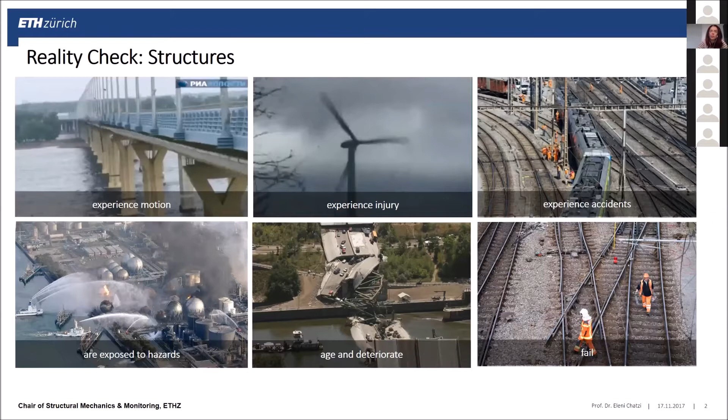As the name of my chair implies, our focus is twofold: structural mechanics and monitoring. We deal with aspects across this chain, from data acquisition via sensing, to the use of models coupled with or independent from the data, usually taking dynamics and nonlinearity into account, to assess performance of structural systems, derive useful indicators derived from these models, and finally support decisions for the protection of engineering systems and assets.

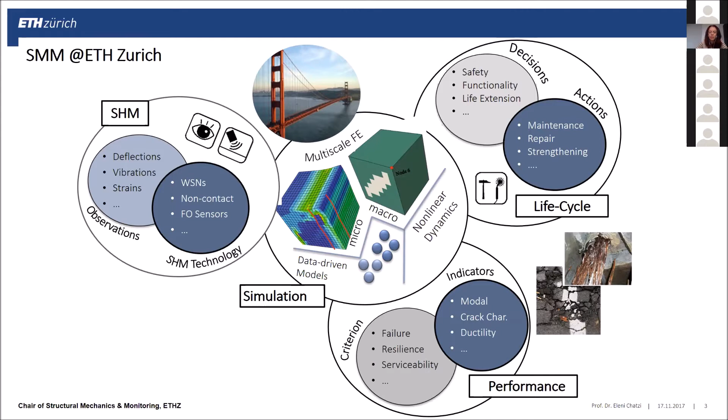In this context, we're also dealing with the seismic challenge. We have activities along these lines for earthquake applications. One has to do with hybrid testing, the mixture of numerical models with physical experiments for testing and understanding the behavior of complex systems.

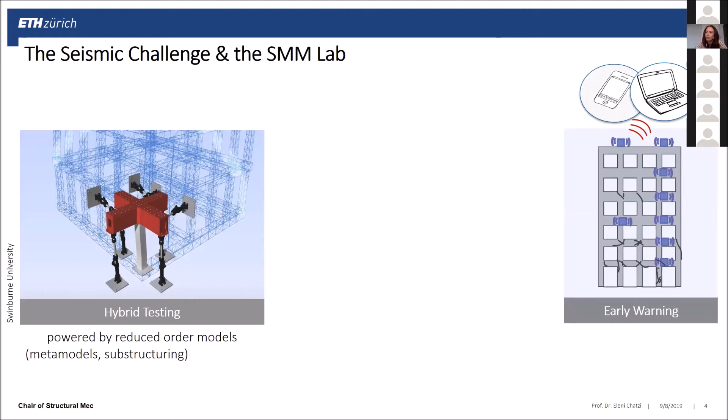More recently we also try to use sensors for monitoring of buildings before and during the event of an earthquake, so that we can fashion warning systems for response reaction.

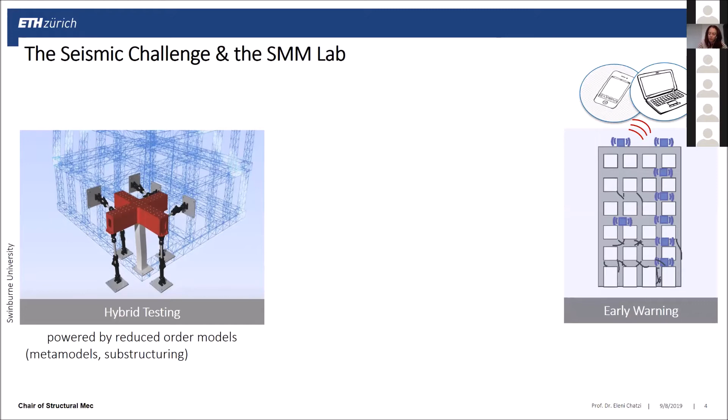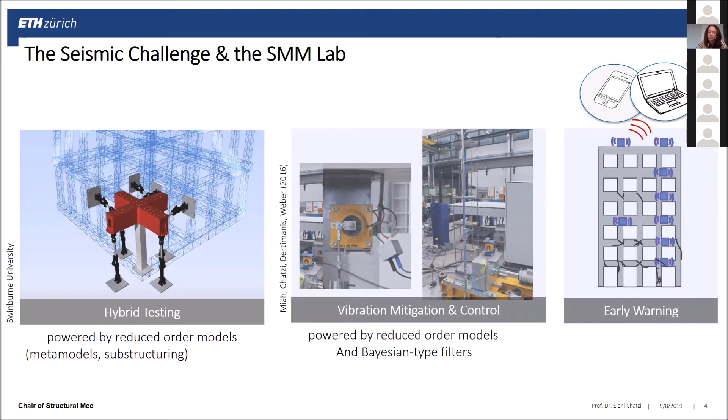Finally, we also work on vibration mitigation and control, which brings me through this long line to the topic of metamaterials, which is only very recent for us. Here, typically, we deal with filtering methods and control methods for semi-active or active control approaches.

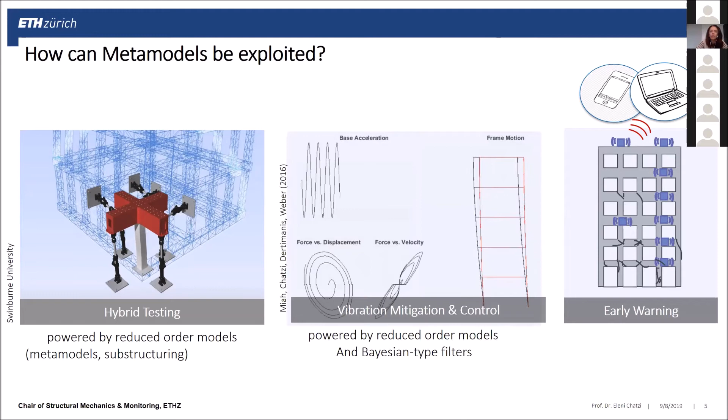More recently we discovered this idea of using metamaterials for vibration mitigation, more of a passive approach to begin with. Although it's relatively recent, we have ended up having a group here at ETH that works on this topic.

The first is Dr. Andrea Colombi, an Ambizione Fellow and senior scientist in our lab, who is leading ideas on the topic. Raquel and Julia, two PhD candidates working in collaboration with me and Andrea on development of metamaterials, whose work I will show, and also Vasilis, a senior scientist, and Kyriakos and Panos, working on this from the point of view of vibration engineering and performance, and also dealing with nonlinear metamaterials. It's really the work of these members that I will try to show today.

I will begin with some numerical investigations, which is where we started when we got hold of the idea. We wanted to explore the possibility of forming one-dimensional lattices that can be conceived to be used as protective barriers for a targeted structure when the source is actually an earthquake.

One of our first investigations was a feasibility study, a proposal of a system that can be manufactured and used in this configuration. We tried to understand what dimensions would be involved to achieve an attenuation of something on the order of a seismic wave.

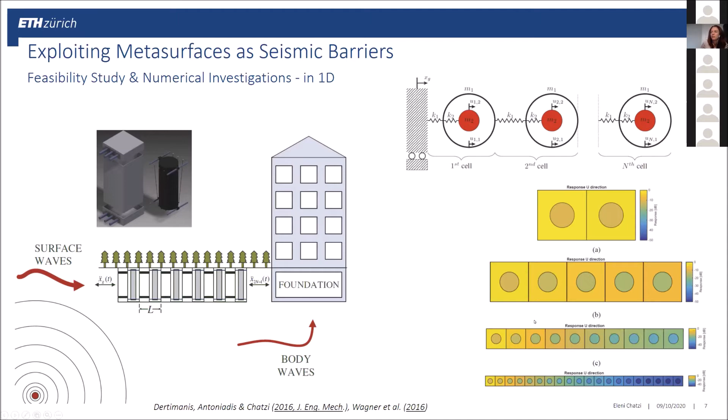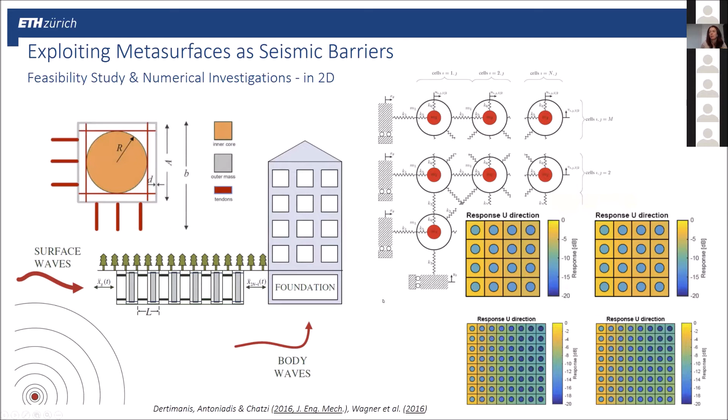We did this for one-dimensional but also two-dimensional configurations from the numerical point of view, looking into the dissipation achieved when an earthquake source enters a barrier that is somehow formed. Some of the results showed the challenges that are involved.

Our target was to try and create band gaps in this very low range, which is relevant for seismic applications due to the low frequency content of earthquakes, but also the type of modes excited in buildings, which mandate a range between 0.5 to 1.5 hertz.

So in 1D and 2D, we were looking for designs, which you will find in these presentations, that would facilitate construction of a system that would be protective in this respect. Although it is feasible, it creates issues or thoughts about what cost is really adequate for offering such protection.

Some further complications to consider: beside the fact that we can maybe promise a band gap where vibration is reduced, there are also effects of amplification outside this range, which for earthquake-type inputs is something one has to keep in mind, as it's not easy to predict the content of such sources.

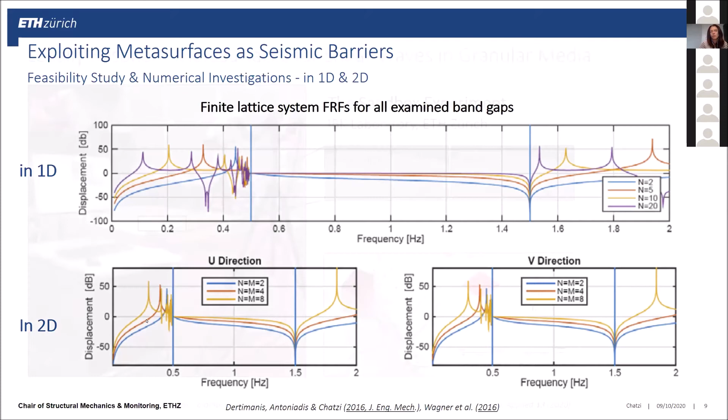We understood that we have to better study the effect, and maybe not just numerically. So one of the first things we tried to set up was an experiment, basically our sandbox at ETH Zürich, testing the performance of metasurfaces—arrays of resonators structured in front of a source—so we can understand performance in terms of mitigation and attenuation of waves.

The experiment I'm showing here is the second round of our experiments, where we try to assess the behavior for shear waves in inhomogeneous media.

And I'm saying inhomogeneous because this is a more realistic approach as to the type of soils that we actually have when we're discussing protection of buildings and earthquakes.

Here you see our setup, which includes the 3D laser Doppler vibrometers. It includes a source, which is a piezoelectric sensor that creates waves in the form of sweep or Ricker wavelets.

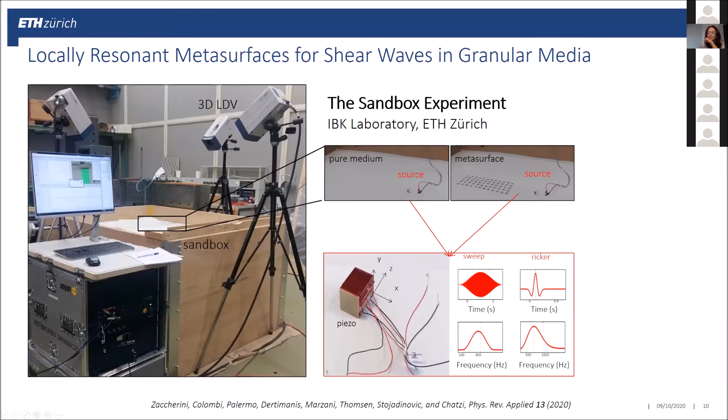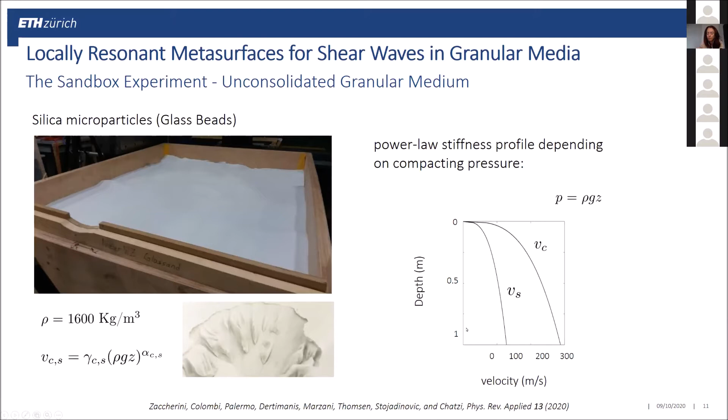You also see a close-up of the medium, which is an unconsolidated type of granular medium. It's basically silica microparticles. It is characterized by a constant density but features this kind of power law stiffness profile, which is essentially a representation of an inhomogeneous medium.

You see here the array of the resonators. These are 48 sub-wavelength mechanical oscillators, which are deposited or structured in an array at the surface of the granular medium. They are 3D printed, scaled, so that we can actually target a scaled up kind of experiment. So the resonator frequency in the scaling is at about 330 hertz.

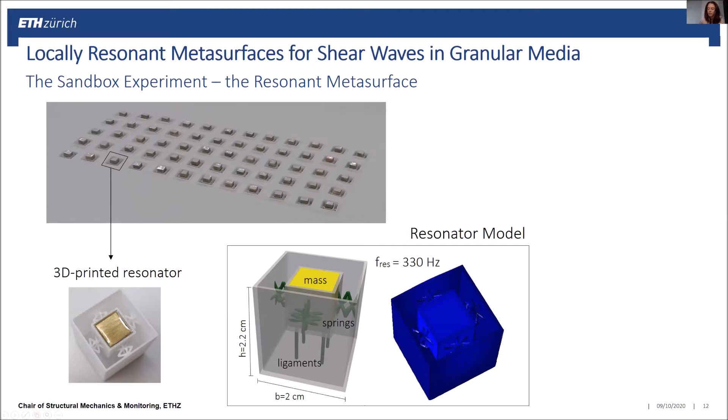A value which is chosen after experimentally identifying the frequency content of the shear waves that we have propagating in this medium, and we have tried to see what is the effect of this array in the propagation of the waves.

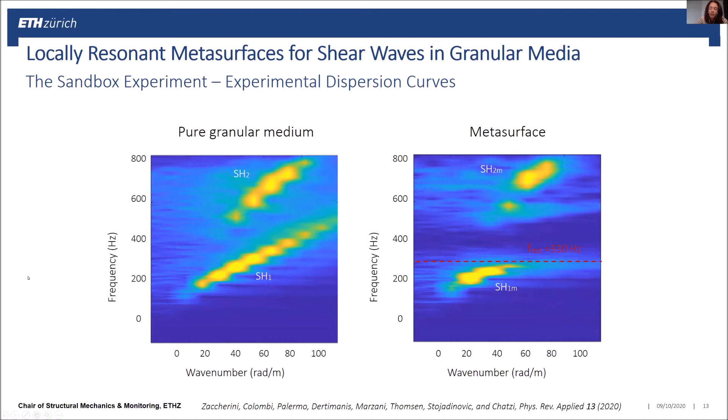So here you see a result of the experiment, the two-dimensional discrete Fourier transform of the velocity data that is recorded through the 3D laser vibrometer. You see here on the left the reference case, which is the case where the sand is just the pure granular medium, so there's no array of resonators, and this is the propagation of the shear wave through the pristine medium when no resonators are actually present.

And you can see here that we have a fundamental shear wave, SH1, and also a second shear mode that can be clearly discerned. You see that this one is prevailing in the lower range of frequencies, and then later on, with a slightly higher velocity, we have the prevalence of the second mode.

Now what happens when you embed the resonators, you see it on the right where we show the dispersion curves with the metasurface. You see that the first mode, which was prevalent in the lower frequencies, interacts with the collective resonance behavior of the metasurface, giving this hybridization effect that ends up creating essentially a band gap, and this appears around the frequency of the resonators.

The attenuation zone arises at these 330 hertz that I mentioned before. Now, in order to understand if this is really a phenomenon that is owed to the resonators, we also tried

the same experiment and measurement for a case where we again have the array of our casings, the 3D printed casings, but without the resonators. So the resonators are removed and only the casing is included. And here you can see that the response resembles more or less the response of the pristine medium, implying that it's really the metasurface that is achieving this kind of creation of a band gap.

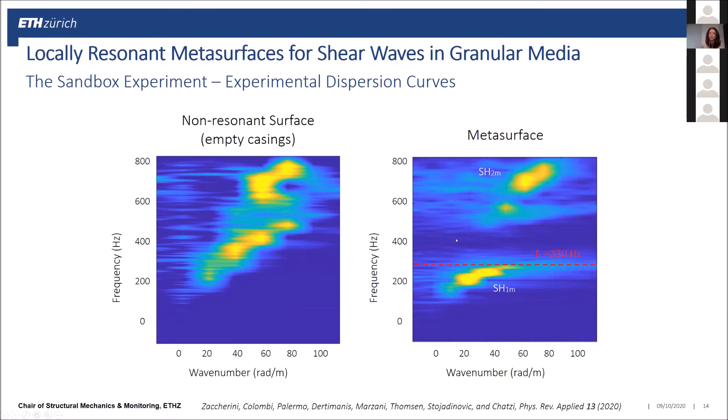Now we also decided to numerically investigate this propagation throughout an inhomogeneous medium, which is something that is not really done. Usually a lot of the investigations target a homogeneous type of medium propagation. And to do this, we were trying to calibrate some sort of parameters for the medium, the power law profile parameters, which was done through an iterative process

by solving an eigenvalue problem that results from the depth-dependent Helmholtz equation. And so by doing this, we're able to more or less calibrate or figure out what is the power law profile that would best agree with our experimental data. And so you see here the analytical dispersion curve, which is contrasted to the experiment.

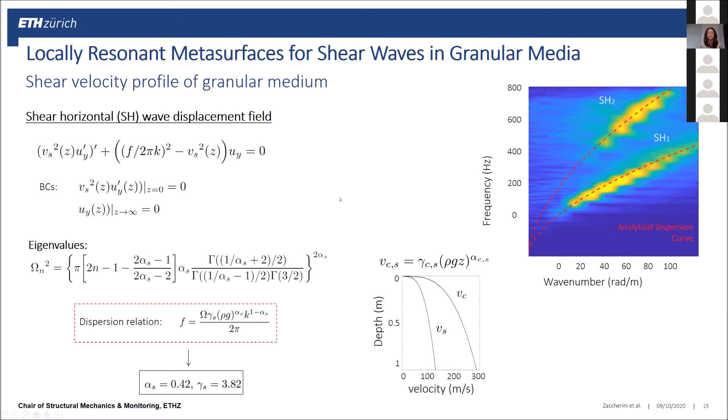Using these now derived velocity profiles, we try to do a numerical simulation. This is done in COMSOL using unit cells with the resonator and without embedment of the resonator, and appropriate boundary conditions, absorbing and Bloch-Floquet boundary conditions. And you see here the numerical reconstruction, which is able to verify what we observe actually in the experiment. And we did that because we wanted the certainty of being able to confirm what it is that we observe.

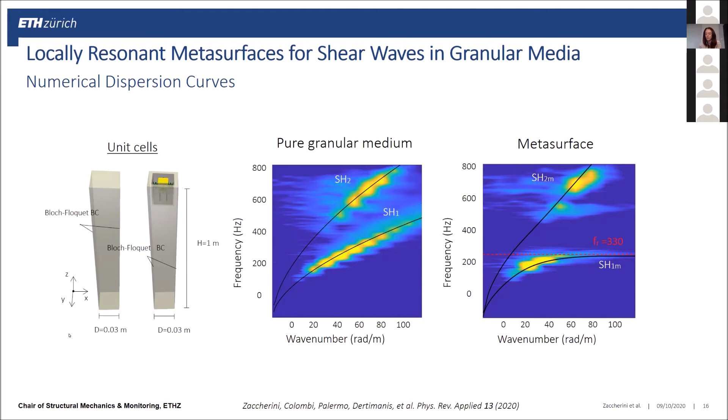So here I'm going to show you one more result purely from the experiment. I'm going to play a video where you see the propagation of these waves on the surface by plotting the laser vibrometer response, having filtered this in the attenuation zone from 330 to 500 hertz, which is our band gap. On the left, you see the medium without any metasurface.

On the right is the medium with the metasurface. And you can see that when the waves are traveling within the metasurface, and when they impinge on the mechanical oscillators, the waves are scattered and attenuated. There is also an explanation here which we offer for what happens exactly at the front, where you have the wave hitting the resonator line. And there you see the comparison between the signals in the case without and the case with the metasurface.

Which basically reveals that the frequency content of the reflected signal really falls inside the frequency range of the attenuation zone and the resonator, which implies that the wave energy is backscattered by these oscillators, which is what we were trying to do in the first place.

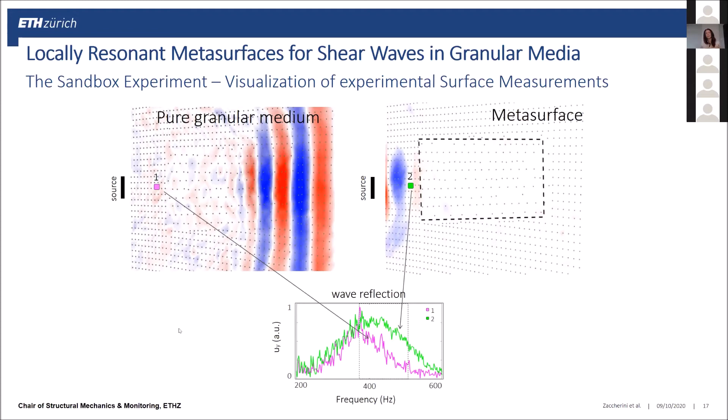Now, the further complication here is really what happens also along or across the depth of the medium, and that's where our numerical simulation and updated model helped. Rachele actually performed this simulation using SpecFem 3D, where you can see also in this last plot what happens in the volume along the depth of the medium. And here, the reason why I mentioned this...

is to demonstrate the shear wave propagation with and without the metasurface. And where we see that part of the shear waves that is not reflected by the resonators actually travels under the resonators. It's significantly attenuated, but it has to be understood that in these inhomogeneous soils, you have this effect where the wave actually travels under the resonator zone and could actually be reflected, even though with less power after the barrier.

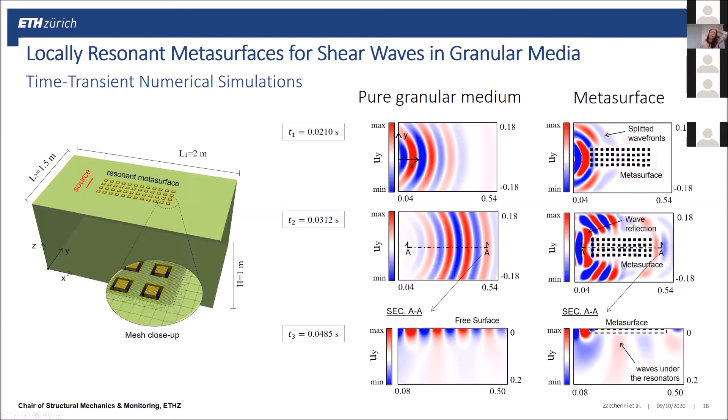Now, what I would additionally like to show is another solution we're looking at, which is not of the barrier type this time, but rather in terms of a meta foundation, let's say, which is of course something that is quite heavily looked at recently in literature and by colleagues.

Some disadvantages we could see is that often it means large dimensions. It's not always granted that there is a possibility to bear the vertical loads. And the lateral stiffness could also not be so sufficient.

And what we proposed to experiment with, just because we wanted to also check this from the point of view of feasibility, was the possibility of using existing solutions for base isolation, basically commercial rubber bearings, specifically the ones produced here in Switzerland, where we used specifications from Mageba, one of the providers. So we tried to see if we can do alternating layers of these rubber bearings and concrete slabs to create a meta foundation for realistic structures.

So here you see one of the structures we actually could simulate that is here in Zurich, a building which we placed on top of this foundation.

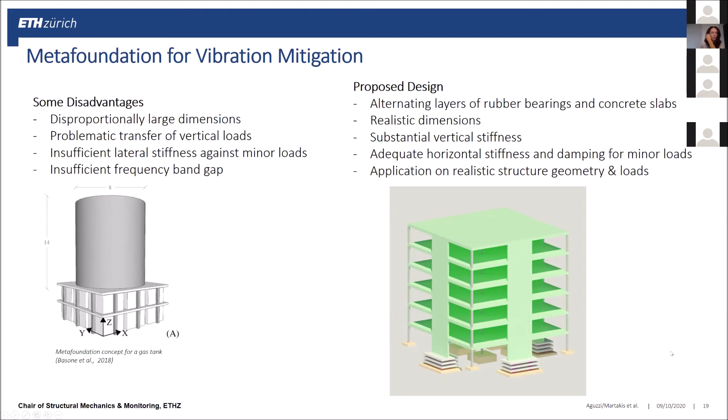And so in this case, Giulia again performed a SpecFem simulation, which is more of a linear analysis software, but as a first stage performed the simulation to see what kind of modes are excited by use of this foundation and what is otherwise the excited response of the building. So we used this kind of layered logic.

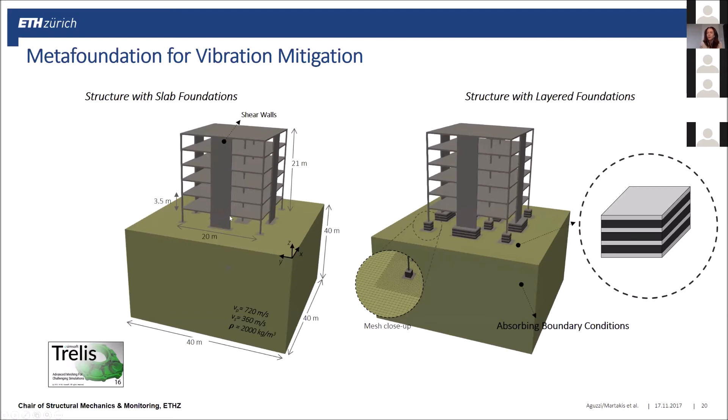We did this for both the slab foundation and the layered foundation, and tried to compare the outcomes in terms of the time response and the frequency response of these signals. And here you see...

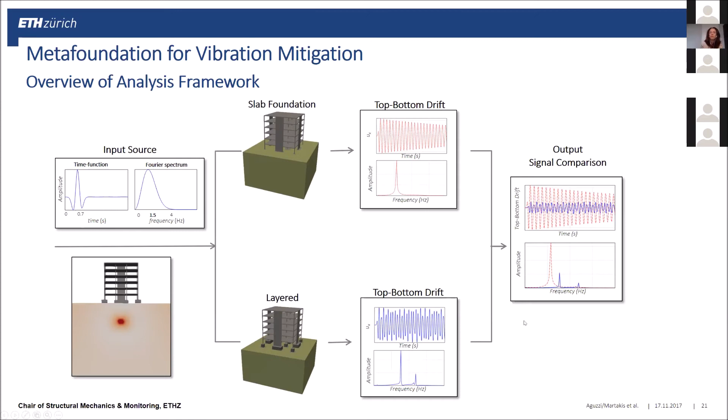a close-up, or rather an explanation of how the input source is being applied, which is a Ricker wavelet centered around the first mode of the building, here at about 1.5 hertz. We give the source as an input with components in both the X and Y direction.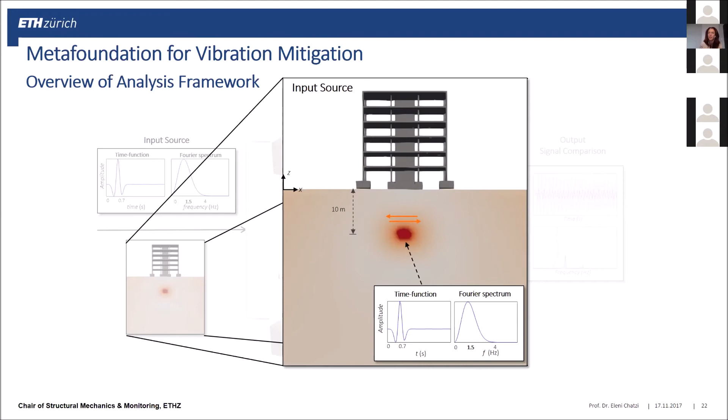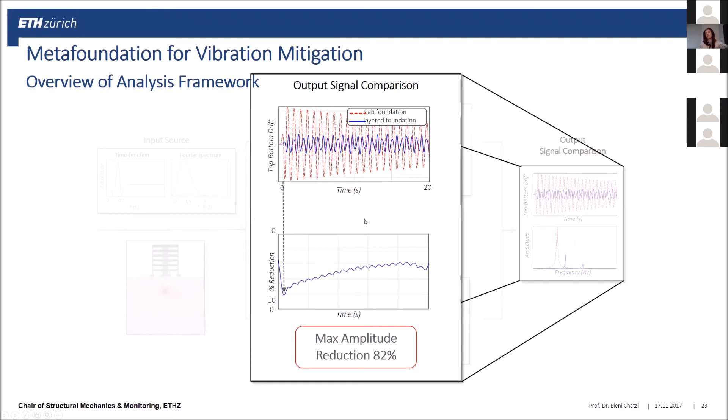Then we do the comparison of the drift of the building without and with the layered foundation. Here you see obviously the effect of the mitigation and the amplitude reduction, but what is also interesting for us to note is the type of motion.

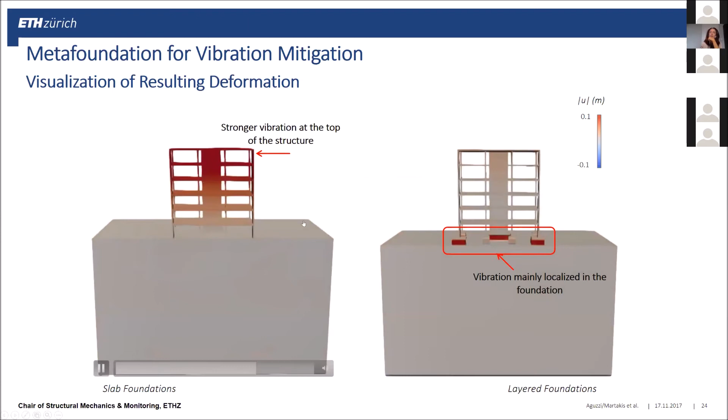So actually, let me show you here the videos, the visualization of the response of the systems with the layered foundation and without. You see here that the vibration is actually mainly localized in the foundation. So this was a behavior that Julia wanted to explore a step further.

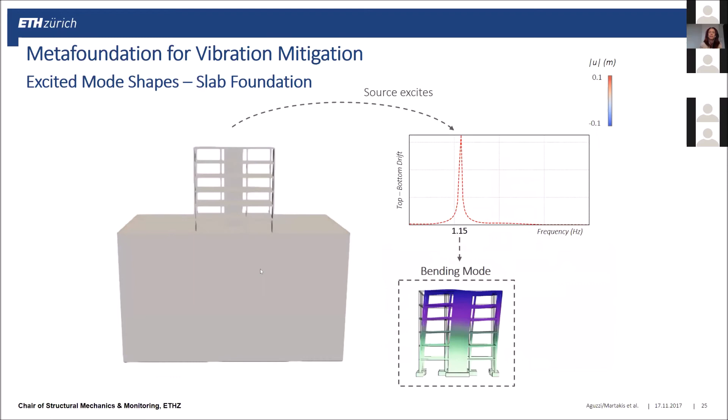And to do this, we try to check the main modes that are excited by the type of source that we're applying. And so here you see the bending mode of the building that is primarily excited at about 1.15 hertz. And additionally, a second peak in the spectrum that corresponds actually to the foundation mode.

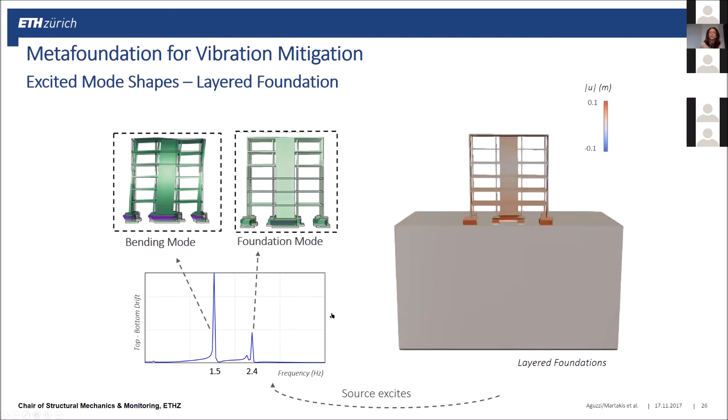And this is where a lot of the energy dissipation comes from. So a large part of the energy is trapped in the foundation, which is this design that includes the lead rubber bearings. Here is also a visualization of the mode or of the foundation, which a very good thing here is that this mode is of course separate to the structure. It's really a characteristic of the system, and it is a tailorable mode in the sense that we can, by design, configure what this is.

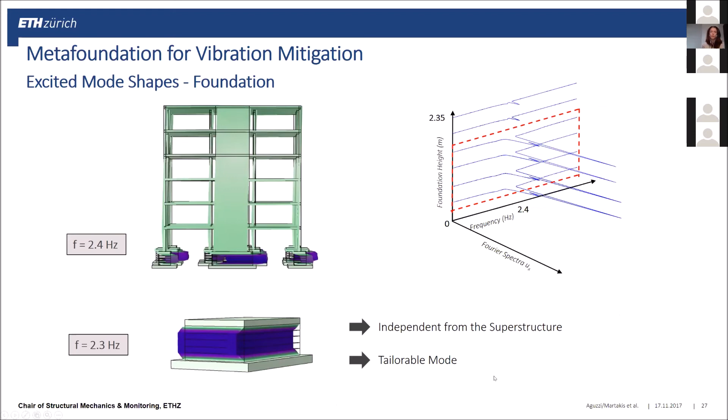Maybe as a last statement, I should explain that while this previous analysis started to see the wave propagation, it was done in a software that is primarily linear. We also did the proper structural analysis using the base excitation to the system of foundation and building.

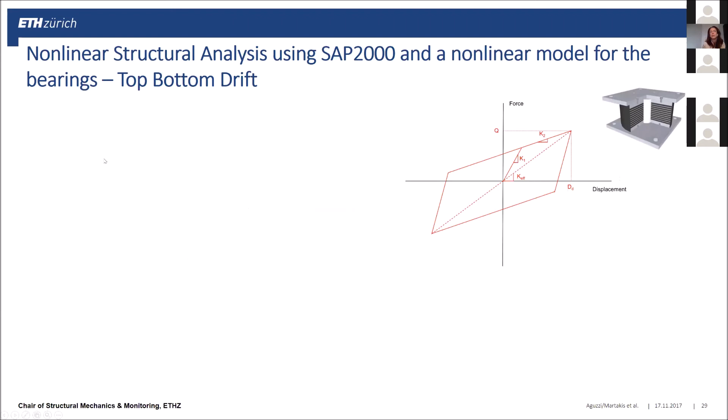Here we are using the nonlinear constitutive relationship that we know describes this kind of damper, more or less bilinear. Again, we tried over different time histories. I'm just showing you one of the possible waveforms here. We use design earthquakes on the basis of the spectrum here in Swiss sites.

We show the comparison between traditional base isolation and this layered type of meta foundation, where a significant decrease is noted both in the response of the structure, but also in the response in the displacement of the isolation or the foundation system.

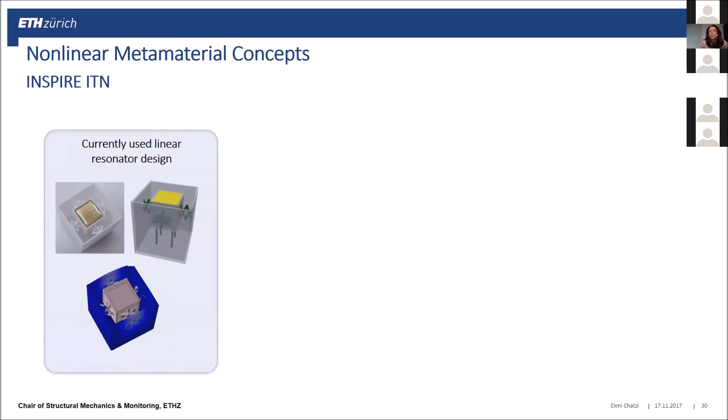Maybe as a closure, since we don't have much time, I leave you with this idea that we're exploring nonlinear metamaterial concepts with Vasilis and Kyriakos. We wanted to move away from the currently used linear resonator designs, and try nonlinear candidates that can be thought of as a unit cell design that can be recombined to form a chain.

There are many alternatives that exist and have been proposed in the literature, and we will be looking more into two options: the meta-impactor and a concept that exploits geometric nonlinearity.

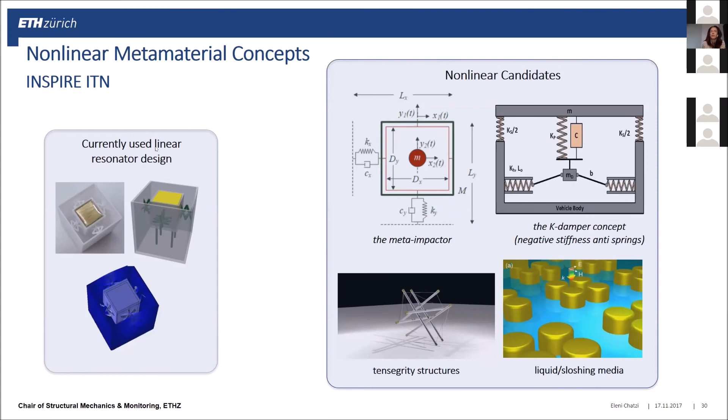For the meta-impactor, we're talking about a lattice system, but now a lattice of multiple impact dampers, mass-in-mass systems, but the inner mass is laterally unconstrained and free to impact on the sides of the system. You can think of this as more of a sphere inside a container type of impactor.

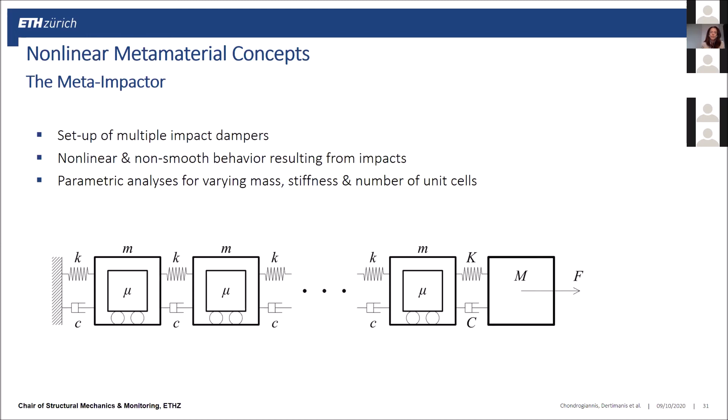The impact phenomena create a highly nonlinear and non-smooth resulting dynamics, and this is interesting for us from the point of view of understanding how we can use it to maximize the dissipation for the overall structural vibration. To study this response, we begin with an analytical assessment using the equations of the system.

We use the conservation of momentum equation and the definition of the coefficient of restitution. This gives us a relationship between the prior and post-impact velocities, which we use to understand the energy dissipation at each impact.

Specifically, we try to formulate this using a metric of energy dissipation. This metric is the ratio between the energy absorption resulting from all impacts, which you see here, over the total input energy to the system.

By examining different types of possible designs, meaning mass ratios of inner mass to outer mass, or the ratio of the resonator with respect to the mass of the system we wish to control, we understand how this kind of energy absorption can work.

What is interesting from our point of view is to go as low as feasible, which is really the more problematic area. Ideally we would like energy absorption that is more or less uniform in a graph, but when you go to low masses, which makes the system easier to realize, you get a behavior that is not necessarily optimal.

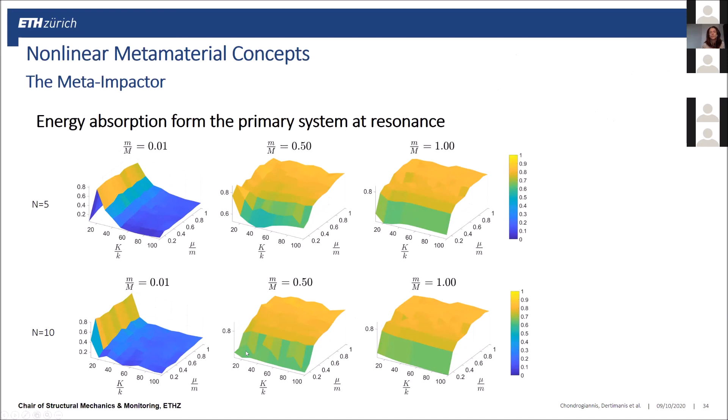This also does not depend, as we saw here, very strongly on the number of resonators. So we're trying to explore this gray line as to how to bring this ratio down, but still have significant energy absorption.

To do this, we're also looking into other alternative designs. The second one, and the one I'm closing with, is the geometrically nonlinear lattice, which exploits this geometric configuration, a triangular arch, which can be calculated analytically.

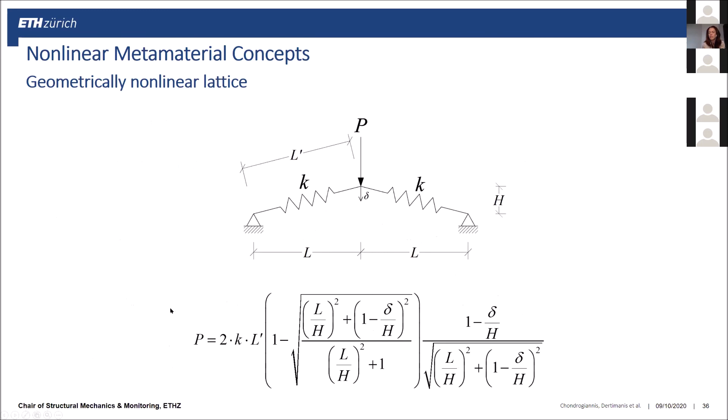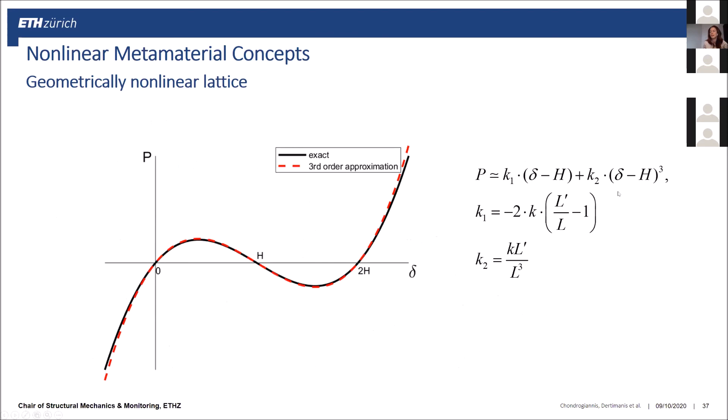We know it is a geometric type of nonlinearity, and we exploit it in order to create a new type of unit cell that is nonlinear in nature. The good thing is it can be approximated analytically, which we try to exploit for understanding the dispersion relationship using an infinite lattice and using Bloch theory.

Exploiting the Bloch periodicity, we use the harmonic balance method to try to understand the resulting dynamics. We can create a band gap, and in fact this band gap depends not only on the frequency and wave number, but also on the relative oscillation amplitude, which is something that is an artifact created from our harmonic balance type of analysis, but it gives us confidence that we can indeed create relatively large band gaps with this kind of concept.

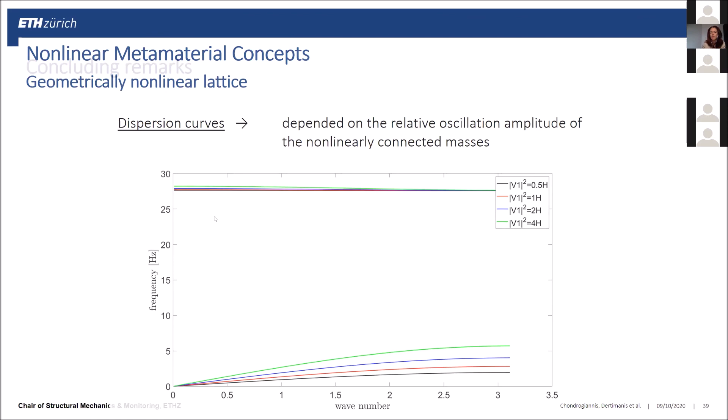To conclude, as I know I have exceeded my time, we're looking into these potential aspects for using metamaterials for structural vibration mitigation or absorption. We have looked into barriers, which has revealed some limitations, but looks very promising or more feasible for shielding structures or machinery from man-made vibrations, maybe railway-induced vibrations.

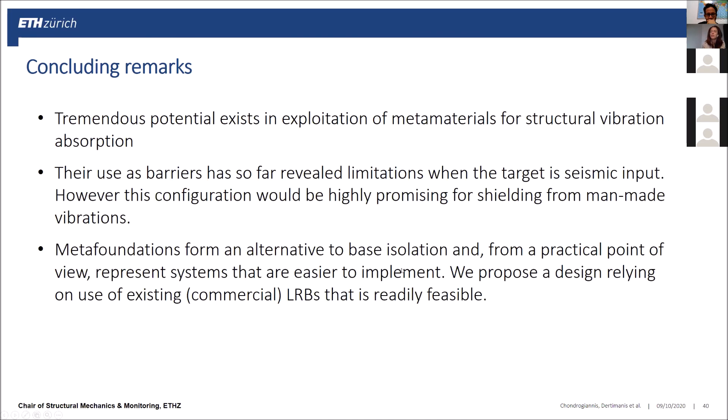We looked into meta foundations as something that can indeed be a replacement to existing type of base isolation systems, and we tried to experiment with a design that could already be materialized because it's using just commercial bearings, essentially. We're also trying to look into the use of nonlinearities for extending our reach. This concludes my summary, and we welcome any questions and comments from colleagues.